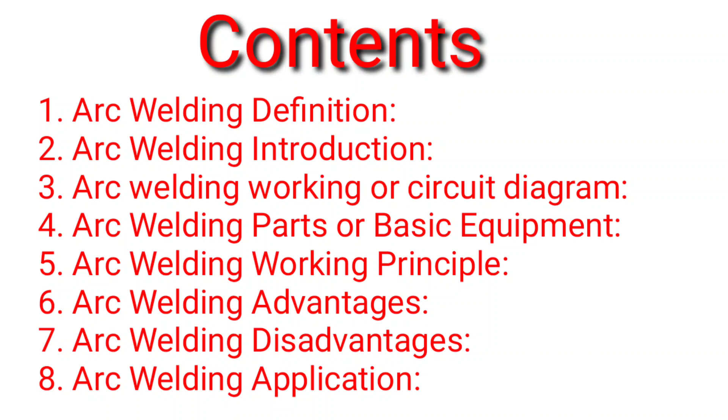Arc welding is a welding process used to join metal to metal by using electricity to create enough heat to melt metal, and the melted metal, when cooled, results in a binding of the metals. Arc welding is one of several fusion processes for joining metals.

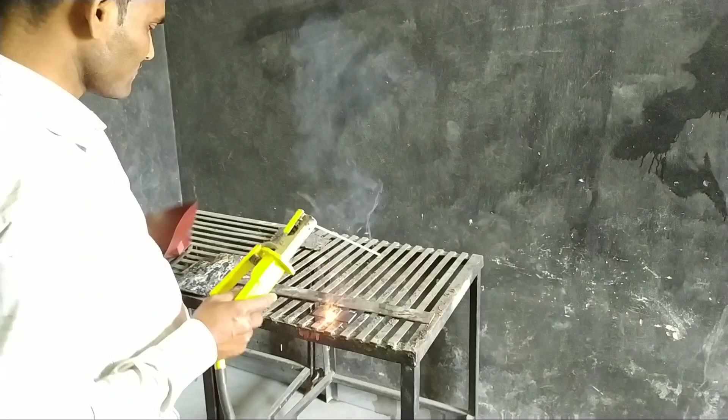By applying intense heat, metal at the joint between two parts is melted and caused to intermix directly, or more commonly with an intermediate molten filler metal. Upon cooling and solidification, a metallurgical bond is created.

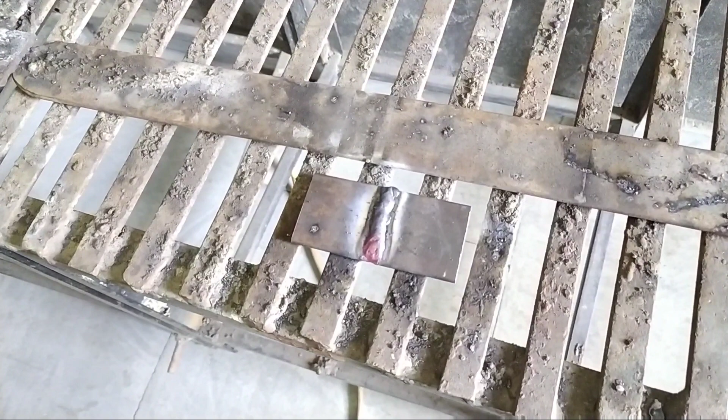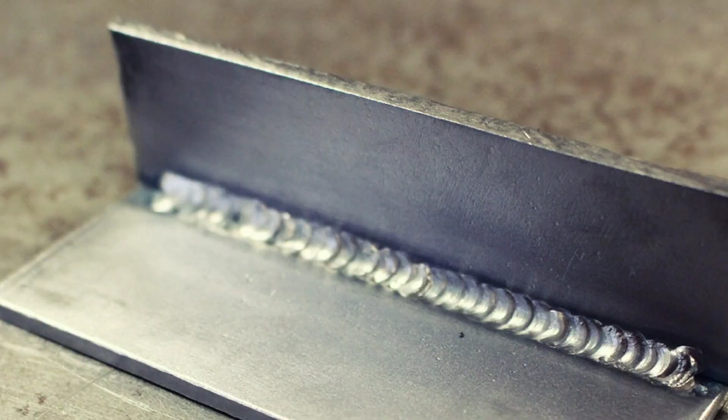Since the joining is an intermixture of metals, the final weldment potentially has the same strength properties as the metal of the parts. A problem that arises in arc welding is contamination of the metal with elements in the atmosphere like oxygen, hydrogen, nitrogen, etc. There can also be a problem with the surface not being cleaned.

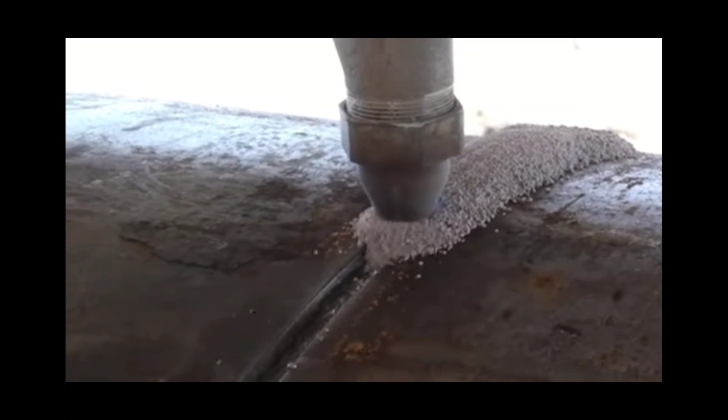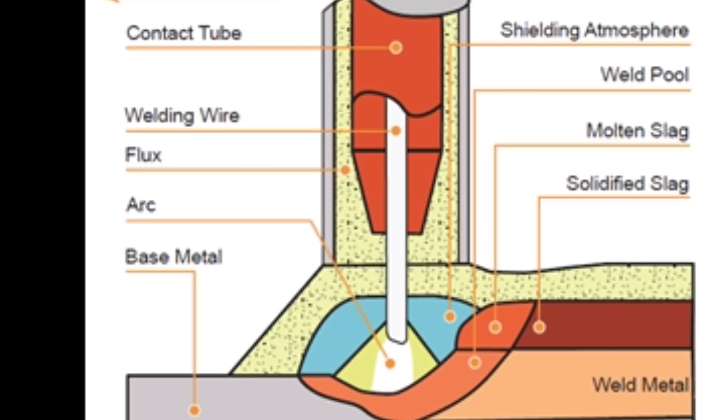The solution to this includes flux and gas shielding. Flux is a material added to clean the surface, and may also give off a gas to drive away unwanted gases. Gas shielding uses an inert gas blown into the weld zone to drive away other atmospheric gases.

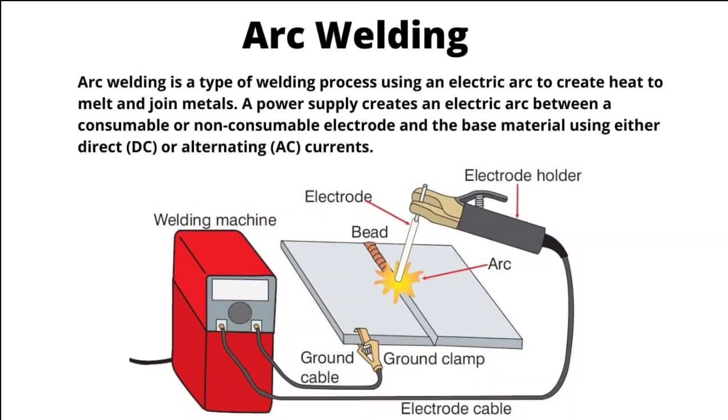An AC or DC power source, fitted with whatever controls may be needed, is connected by a work cable to the workpiece and by an electrode cable to the electrode holder, which makes electrical contact with the welding electrode. An arc is created across the gap when the energized electrode tip touches the workpiece and is withdrawn while still within close contact.

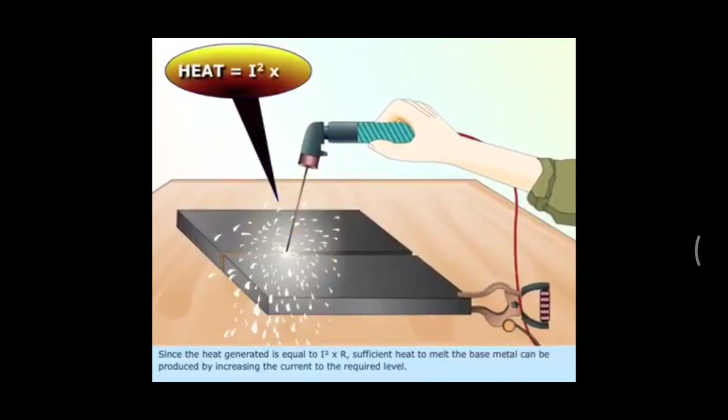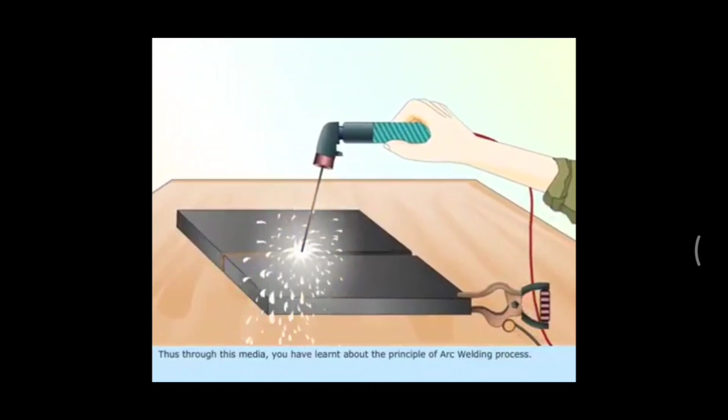The arc produces a temperature of about 6500 degrees Fahrenheit at the tip. This heat melts both the base metal and the electrode, producing a pool of molten metal, sometimes called a crater. The crater solidifies behind the electrode as it is moved along the joint, resulting in a fusion bond.

The main parts of arc welding are the welding machine, electrode holder, electrode, hand gloves, goggles, aprons, chipping hammer, and wire brush. Welding machine: power is supplied from the distribution board to the welding machine, through the electrode cable to the electrode holder. Electrode holder: its function is to hold the electrode.

Electrode: this electrode creates a spark when contacting the work. Hand gloves: while performing welding operations, safety comes first, so for the hand we use hand gloves.

Goggles: as the welding operation temperature is too high, we can see the operation with the naked eye, but after some time the eye gets damaged. Therefore, we use goggles.

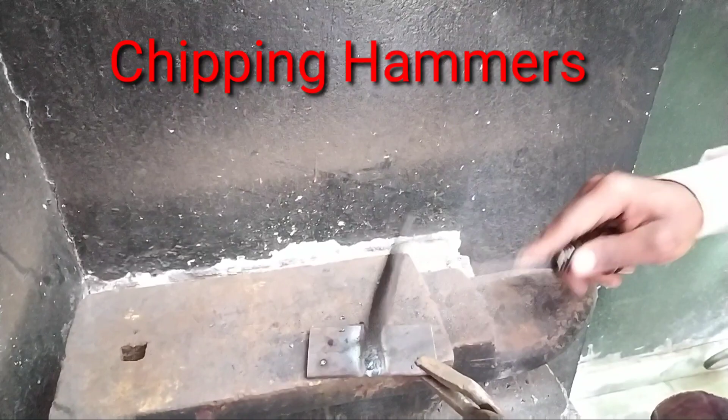Aprons: aprons are like cloths, we wear this for safety purposes. Chipping hammer: a chipping hammer is a tool used to remove welding slag from a weld. Wire brush: to remove unwanted material from the welded workpiece, that is slag, we use a wire brush.

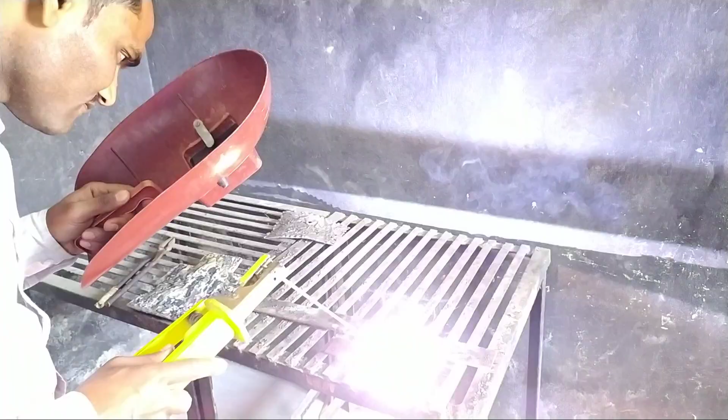Working principle: the working principle of arc welding is that in a welding process, heat can be generated with an electric arc struck between the workpiece and an electrode. This is a flowing electrical discharge between two electrodes through ionized gas.

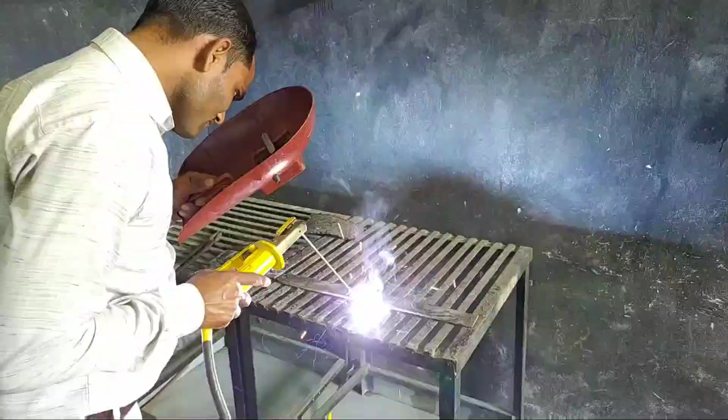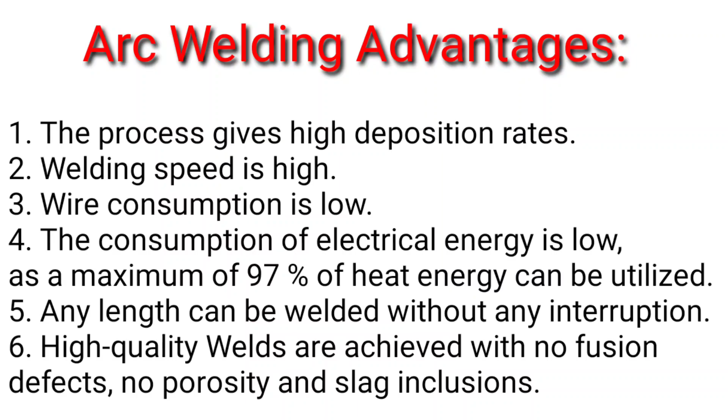The advantages of arc welding: the process gives a high deposition rate, welding speed is high, wire consumption is low, and the consumption of electrical energy is low, as a maximum of 97% of heat energy can be utilized. Any length can be welded without interruption, and high quality welds are achieved.

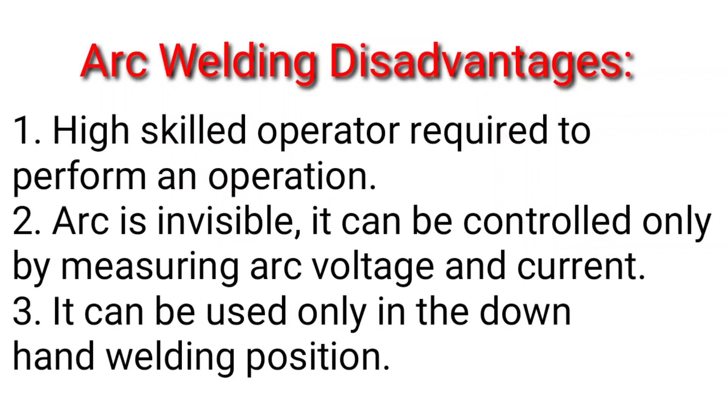Disadvantages of arc welding: a highly skilled operator is required to perform the operation. The arc is invisible, so it can be controlled only by measuring arc voltage and current. It can be used only in the downhand welding position.

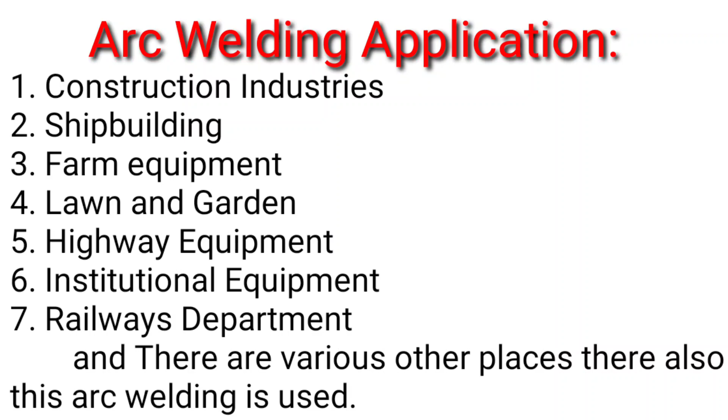Applications of arc welding include construction industries, shipbuilding, farm equipment, lawn and garden, highway equipment, institutional equipment, railway departments, and there are various other places where arc welding is used.